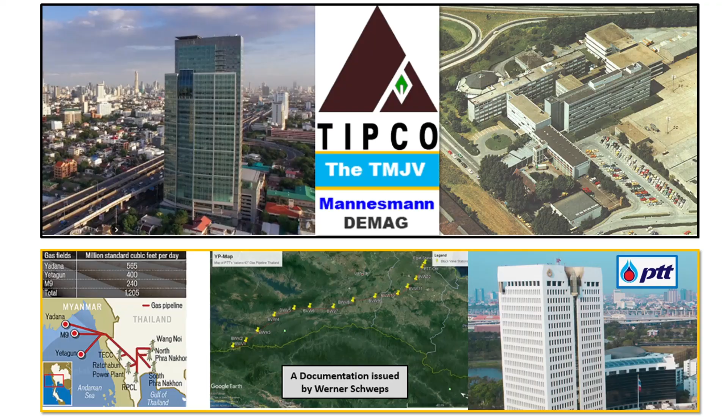Good day. My name is Werner Schweps, and I served as the project director for the TIPCO-Mannesmann joint venture. This joint venture, called TMJV, built the Yadana Gas Pipeline as a lump-sum turnkey contract in 1997-98 for PTT in Thailand. I have already shared some interesting videos about the project. However, my old friend Zurushet Supsar Korn asked me recently to make a short video about the project, which I

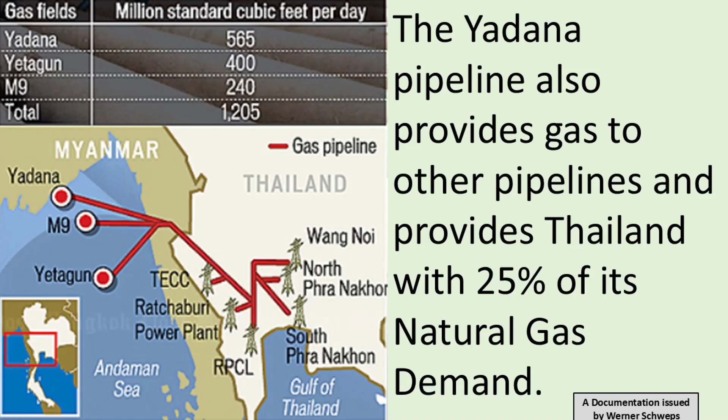am now presenting. The project involved constructing 240 kilometers of 42-inch diameter pipeline to transport gas from the border with Myanmar at Ban-I-Tong to a large power station in Ratchaburi, now known as Ratchaburi Power Company. The Yadana pipeline also supplies gas to other pipelines and provides Thailand with 25% of its natural gas needs. Since September 1998, the pipeline has been supplying gas from Burma and has been in operation for 28 years.

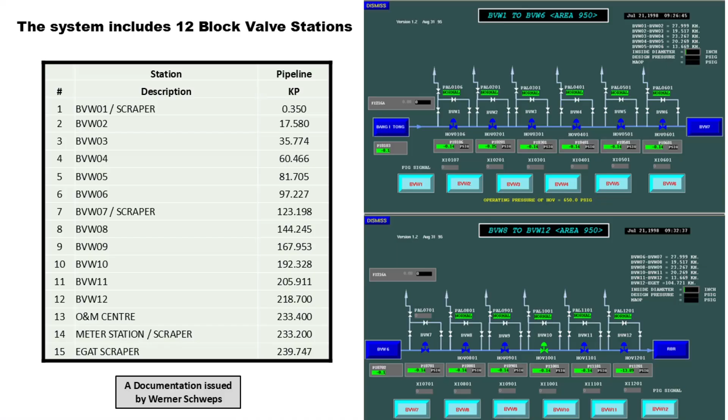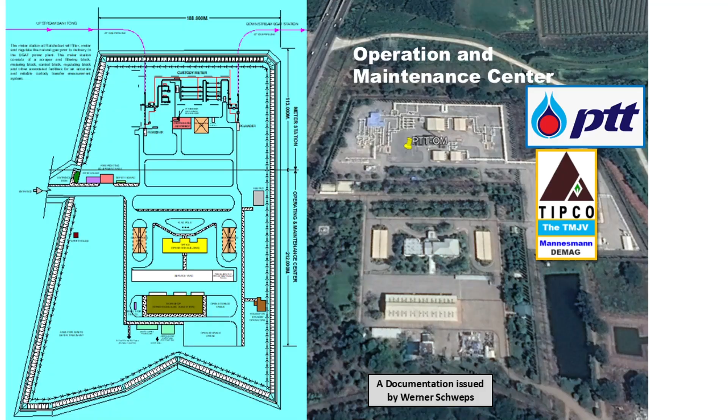The pipeline includes many ancillary facilities, such as 12 block valve stations, metering installations to measure gas flow, and a control center for operating and maintaining the pipeline. It also features a 240-kilometer-long fiber optic cable, telecommunication systems, and SCADA facilities, which are used for control and data acquisition to operate and monitor the Yadana pipeline.

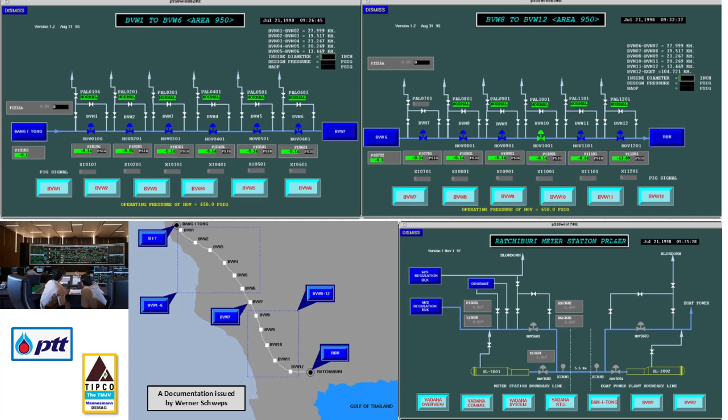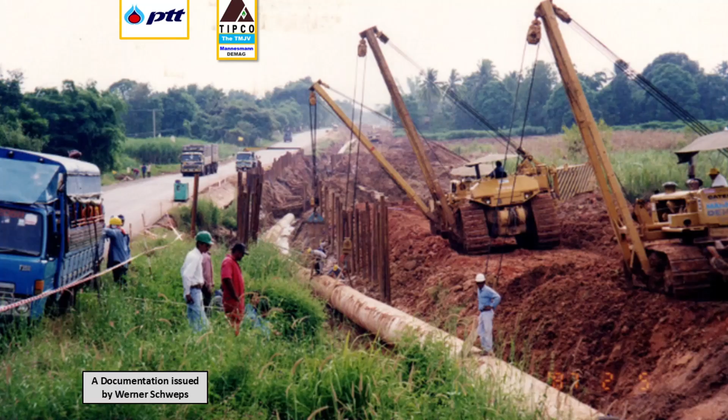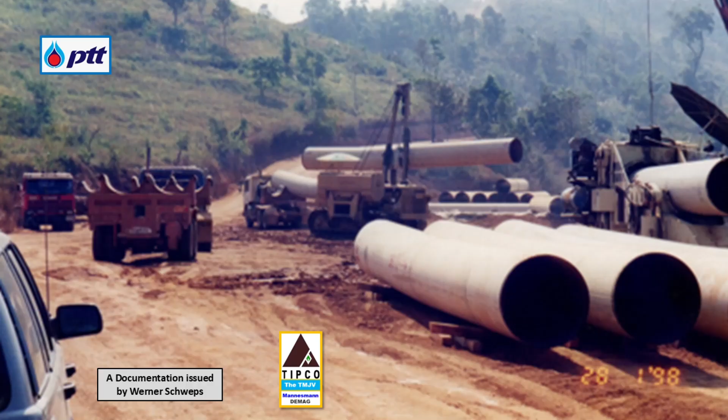The pipeline was laid through high mountains in an untouched forest area with steep slopes. It runs across agricultural fields, along roads and water canals, crossing 93 waterways. To accommodate changes in direction and elevation, the 42-inch pipes were bent by us using our heavy bending machines to create field bends. In particularly challenging terrain with tight curves and sharp elevation changes, we used over 80 factory-made hot bends supplied by us. Given the tight construction schedule, the project execution was extremely demanding.

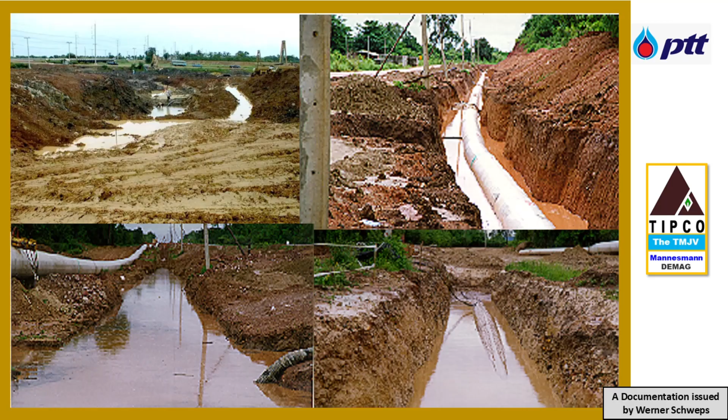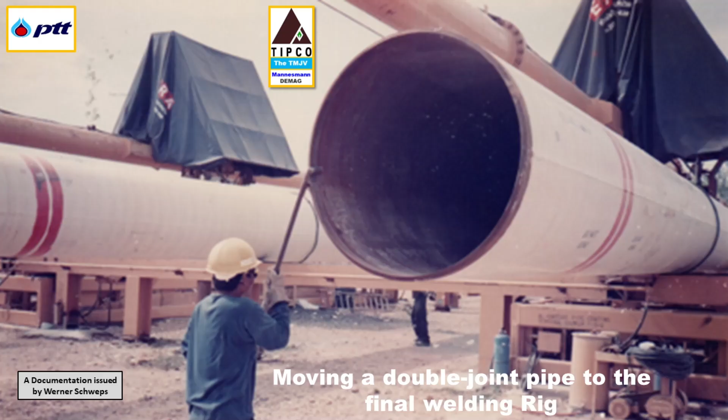The construction period was further limited because 5 months of the available work time coincided with the 1997 monsoon season with the severe tropical storm Linda, which hit us as well. To mitigate some of these challenges of the monsoon season, we decided to double joint about 90% of the 42-inch pipes, consisting of 8,808 welds that were made at our newly built Ratchaburi double joint yard. We completed this work within 4 months.

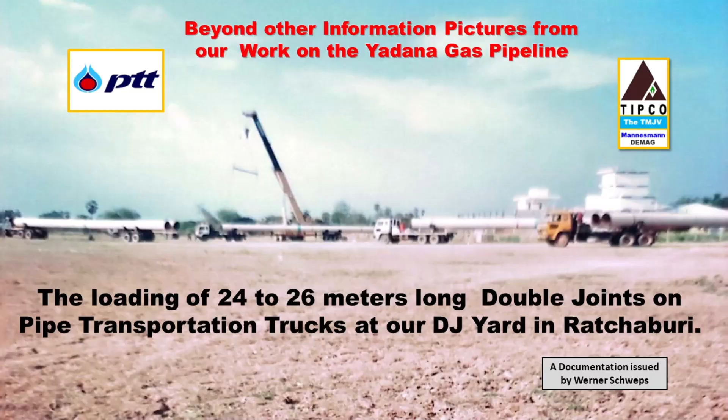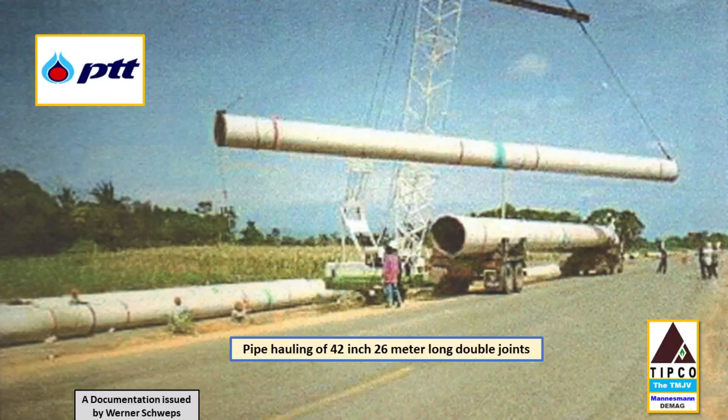While transporting the 25-meter-long double-joint pipes to the construction sites was difficult, time savings in the field were achieved due to 42% less pipe handling and welding. This saved time and fully equalized all the transportation challenges that we faced on the roads. For our main pipeline construction, we used at the beginning in April 1997 2 spreads as originally planned.

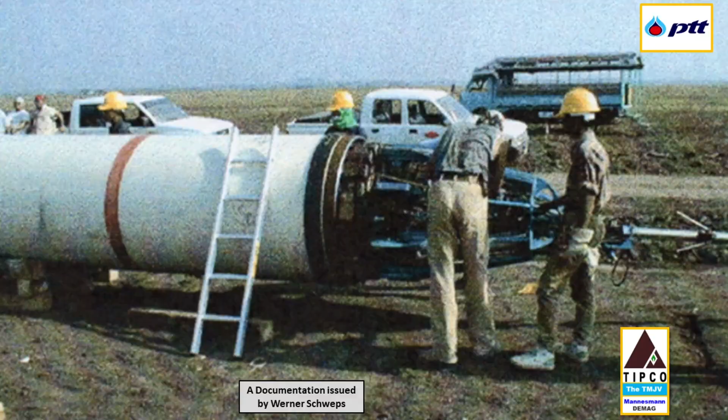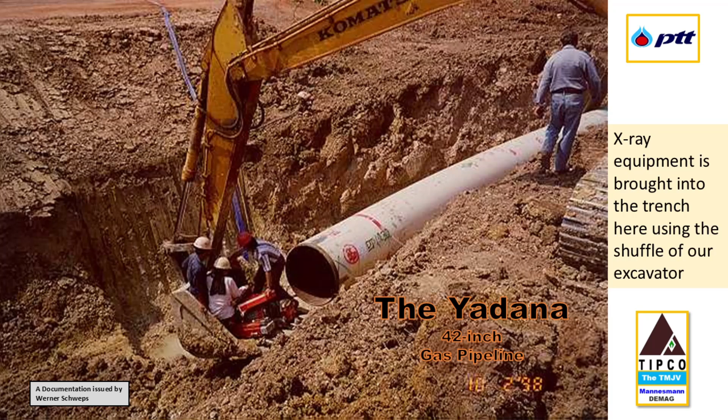All the field welding was carried out using a combination of manual and mechanized welding. We welded a total of 20,700 pipe welds. All 42-inch welds were inspected by radiographic and, to some extent, by ultrasonic testing. In addition, all welds were subjected to a high-pressure hydrostatic test conducted at 150 bar and above. The welds were all fusion-bonded epoxy-coated.

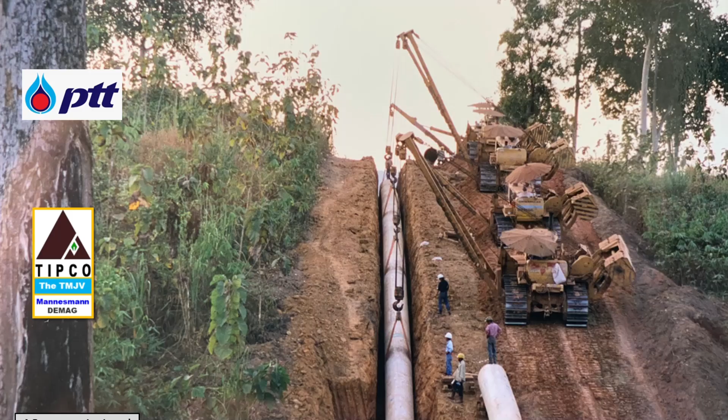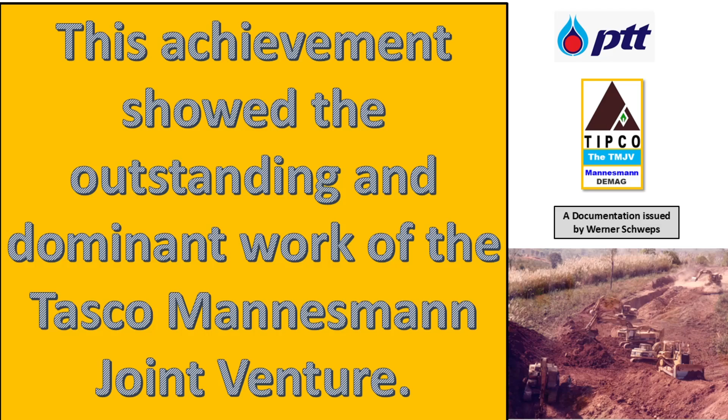The average pipeline laying rate into our excavated trench was 1,320 meters per day with those 2 spreads. We used our side booms for the lowering-in activity, including the subsequent tie-in work of the 42-inch pipe strings. The contract established 3 important milestone dates, and we reached all milestones ahead of schedule. This achievement showed the outstanding and dominant work of the TIPCO-Mannesmann joint venture. It is extremely important to note that our construction work was generally ahead of the project schedule.

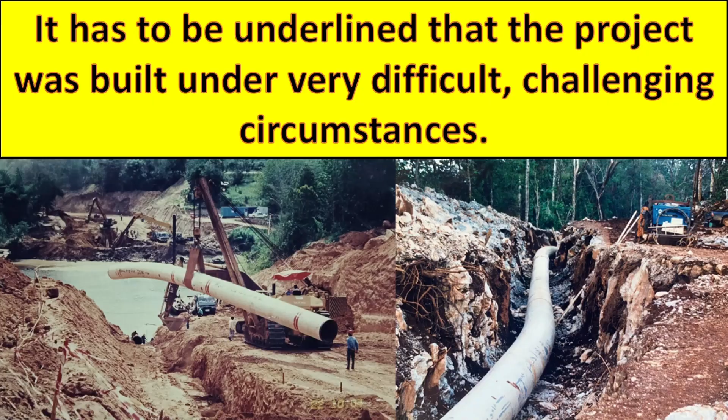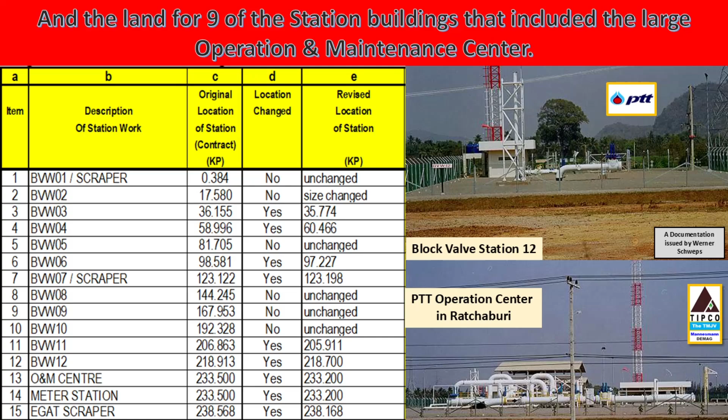It has to be underlined that the project was built under very difficult, challenging circumstances. This included many major technical problems and subsequent project design changes that resulted in 43 change orders. Moreover, there was the late handing over of 50 kilometers of land by PTT for our pipeline work and the land for 9 of the station buildings that included the large operation and maintenance center. In addition, we had 154 landowner stoppages.

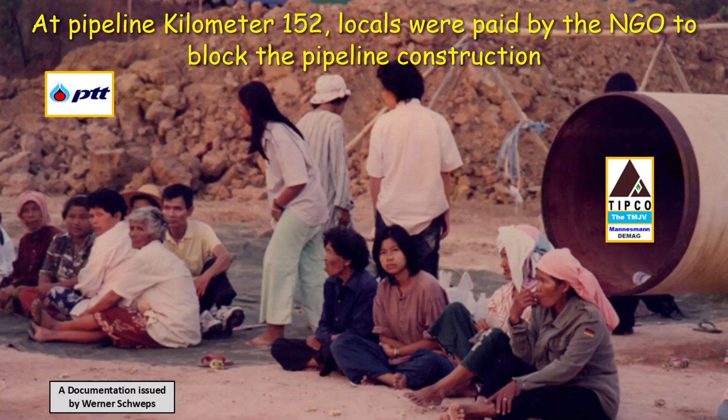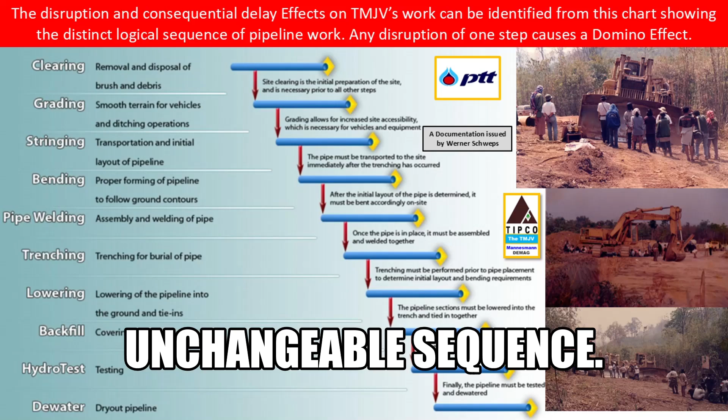The effect of the pipeline construction work stoppage and the relocation of activities was not only on the crew immediately suffering the stoppage. Each stoppage unavoidably impacted subsequent pipeline activities, since the construction of a pipeline is carried out by distinct work steps that are executed in a logical, unchangeable sequence. All this and some other issues, such as engineering errors discussed here later, led us to file claims demanding appropriate compensation from PTT.

But all these work delays weren't enough. Then, almost out of the blue, the Asian financial crisis hit Thailand in July 1997 very hard, and our project as well. This financial crisis impacted everyone and led to some sluggish monthly progress payments by our client PTT. From this time on, our change order work was not paid by our client. This payment occurred 20 months later.

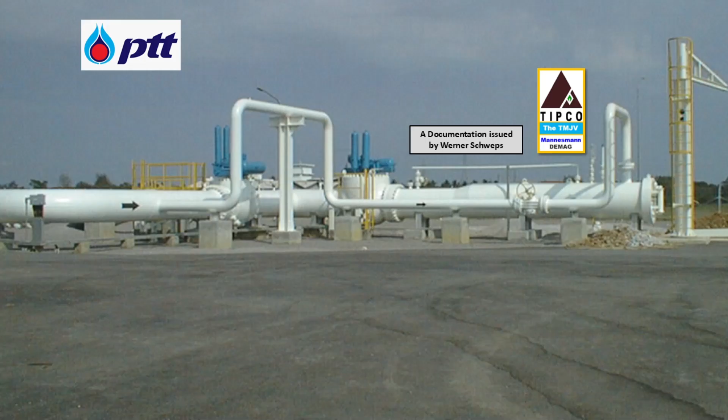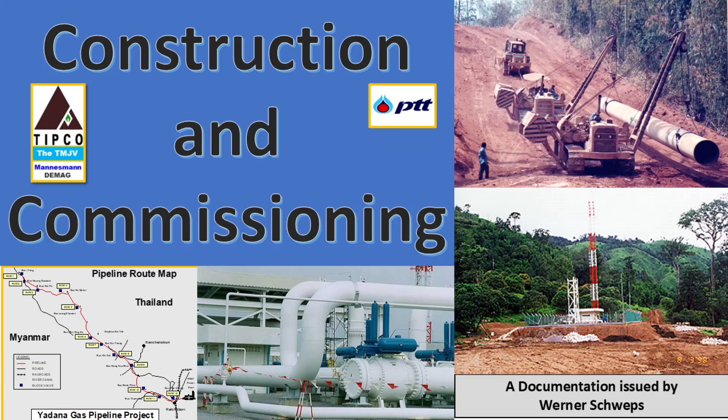To overcome this enormous liquidity problem, TIPCO and Mannesmann supported the joint venture in financing the huge ongoing project costs. It's essential to note that the joint venture was responsible for supplying all permanent pipeline materials and equipment, including 7.5 kilometers of 42-inch line pipe, as well as pipeline construction and commissioning.

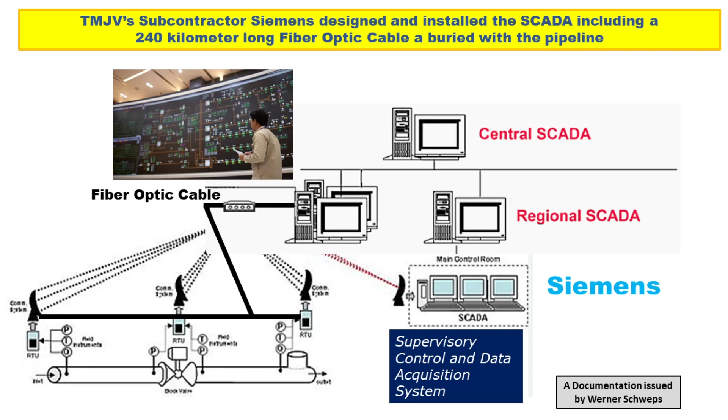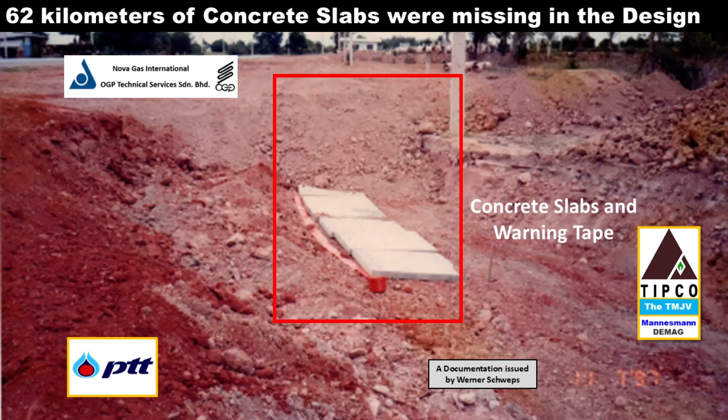Regrettably, the engineering included several design errors and deficiencies that clearly demonstrated that the construction site reconnaissance was inadequate. This was demonstrated by the 62 kilometers of missing protective concrete slabs for the gas pipeline along the roads, as well as the lack of a 1.5-meter soil cover for the pipeline.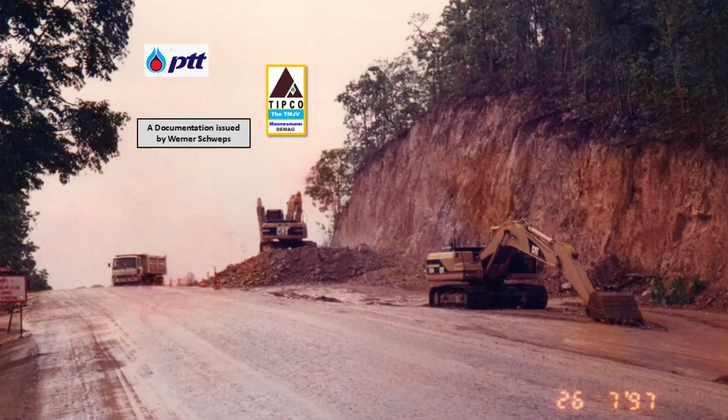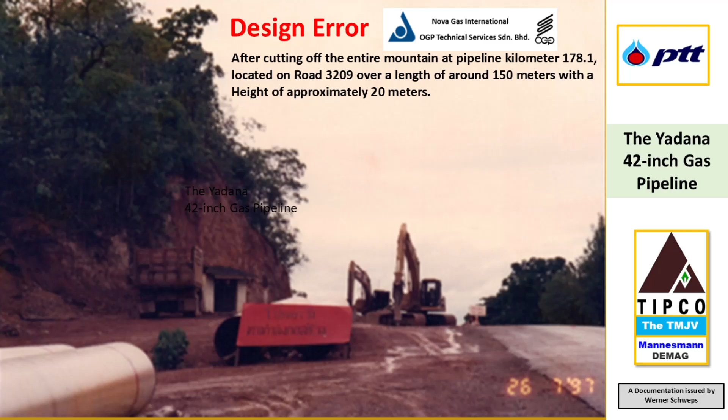Likewise, the removal of approximately 9 kilometers of adjacent road embankments, which consisted of mountains, was not specified in the drawings, and the highway department insisted on this removal to allow for future road expansions without relocating the pipeline. Here, we removed approximately 900,000 cubic meters of earth and rock to lower the embankment to road level.

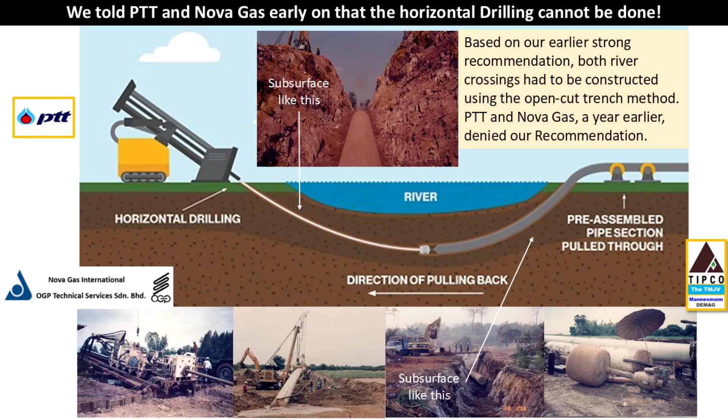For the two major river crossings of the Kwai River at Pipeline Kilometer 68 and Pipeline Kilometer 100, the horizontal drilling method in rock-saturated soil was specified by PTT and their engineering consultant, Nova Gas OGP. However, this drilling method was not feasible. It failed after 4 drilling attempts and had to be abandoned after the work began on the river crossing at Pipeline Kilometer 68.

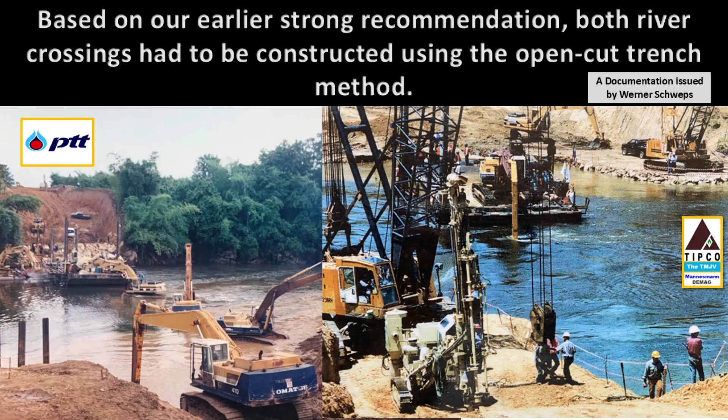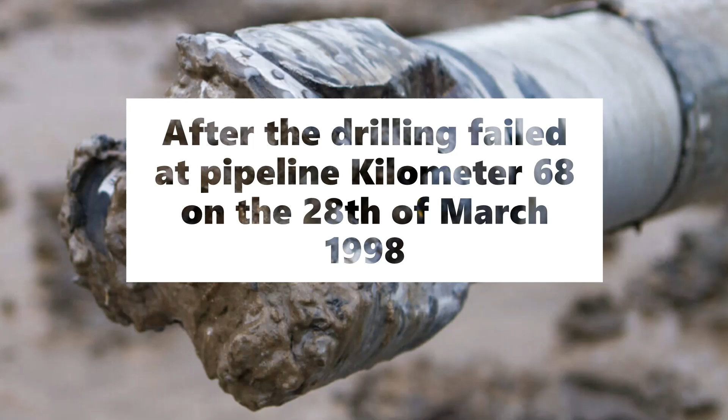Based on our earlier strong recommendation to our client PTT, both river crossings had to be constructed using the open-cut trench method. However, PTT and Nova Gas, a year earlier, denied our recommendation. Finally, after the drilling failed at Pipeline Kilometer 68 on the 28th of March, 1998, PTT agreed on the 31st of March, 1998 to use the open-cut method and told us, bizarrely, it is up to us what to use.

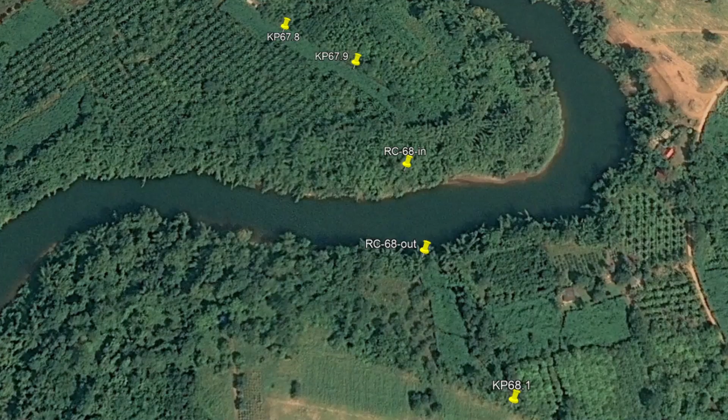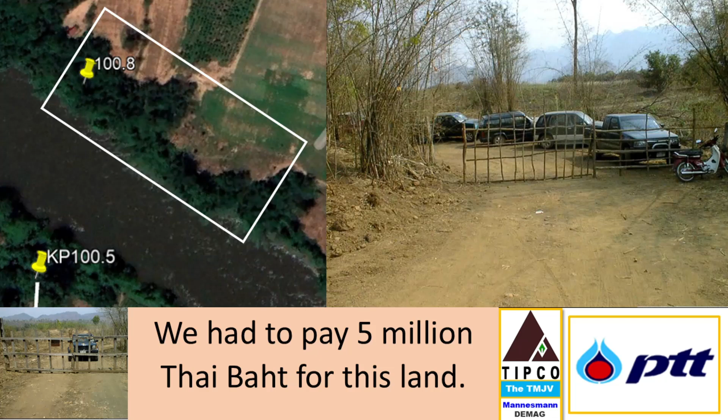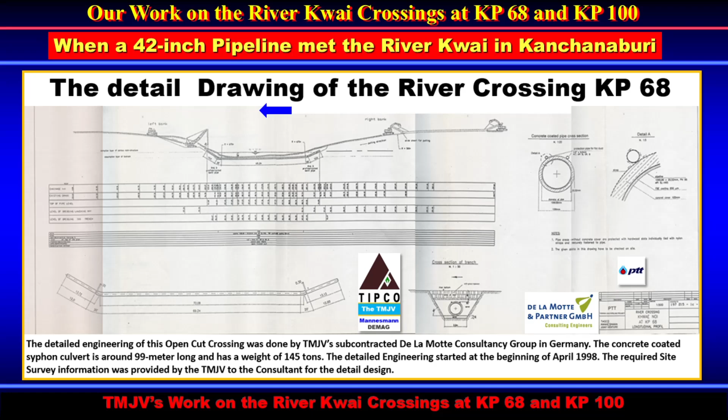We then had to negotiate with the landowners and clear the land. At Pipeline Kilometer 100, we had to acquire 20 rai, or 32,000 square meters of land, and we paid 5 million Thai baht for this land. In parallel, we had to carry out detailed construction planning and complete the detailed engineering work that we had already begun in anticipation of a possible horizontal drilling failure, and mobilize pontoons and other specialized construction equipment, such as drilling rigs and others, in an extreme hurry.

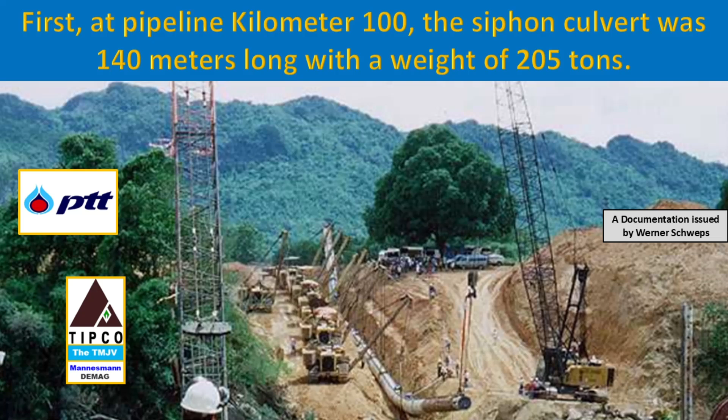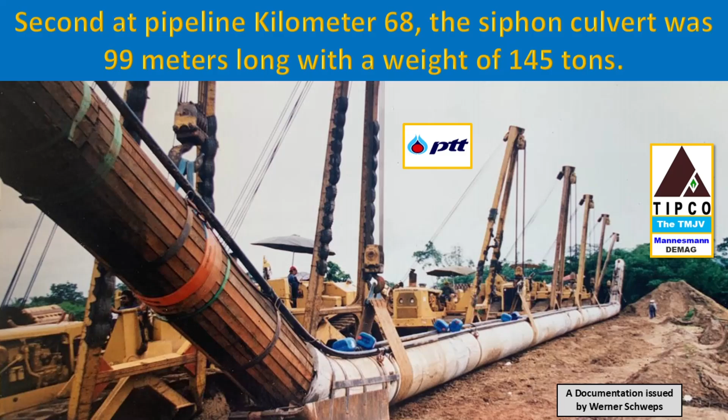The two concrete-coated swan neck siphons prefabricated by us had the following dimensions. First, at Pipeline Kilometer 100, the siphon culvert was 140 meters long with a weight of 205 tons. Second, at crossing KP 68, the siphon culvert was 99 meters long with a weight of 145 tons. As it is obvious from these dimensions and weights, those pipe strings were large and heavy, making them difficult to transport to the trench location in the river.

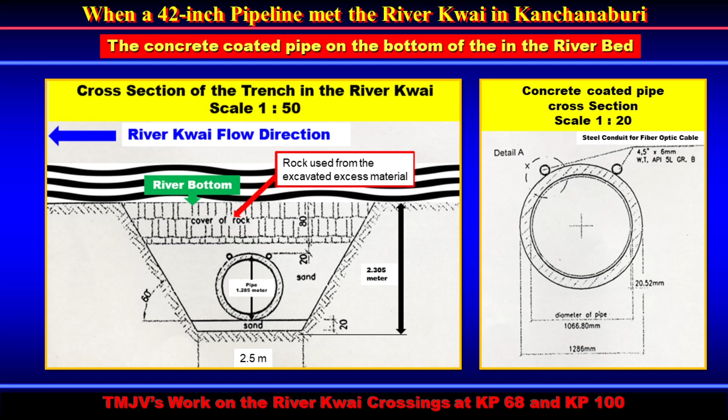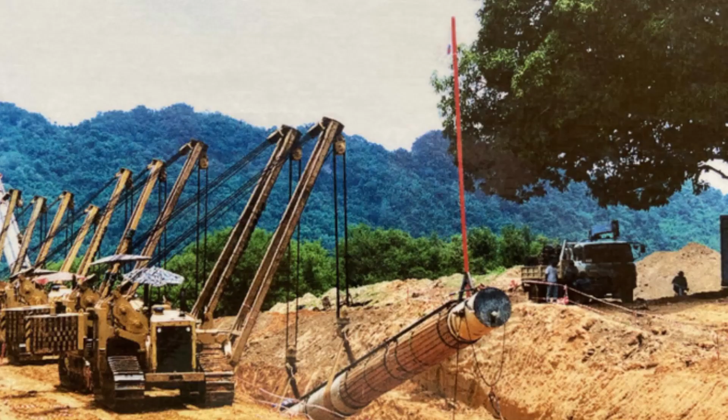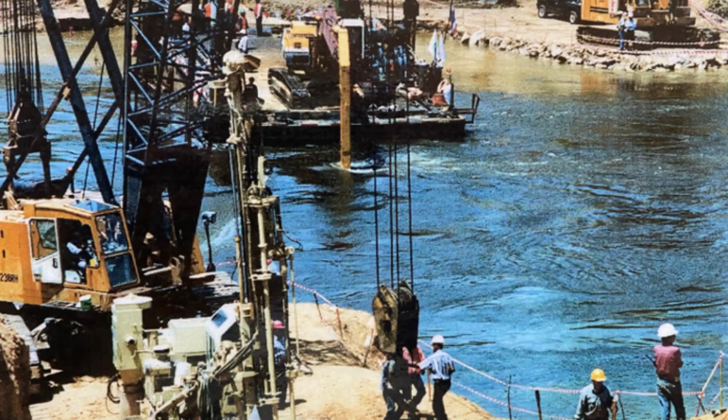The underwater rock blasting was one of the major challenges, along with rock removal, to achieve the required depth of around 2.3 meters in the river trench measured from the river bottom. For the lowering in, we used a total of 8 side booms, 2 70-ton cranes, and an excavator on a pontoon. With our side booms, we managed to move the siphon culvert from the fabrication area near the West River bank, slowly and steadily. The 70-ton cranes were positioned on either side of the river, while the excavator was situated on a floating pontoon in the middle of the waterway.

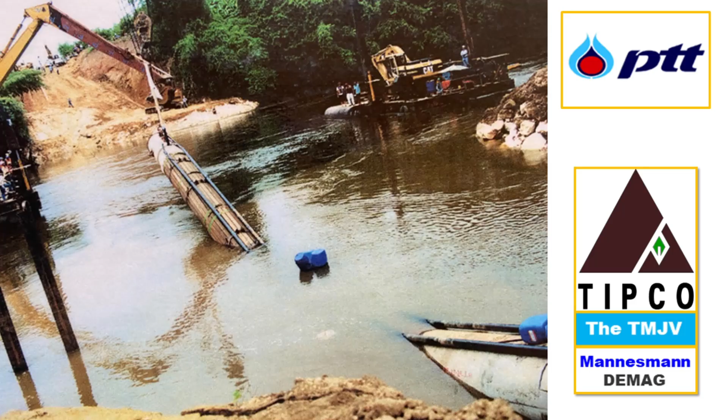To keep the siphon culvert in the correct position against the river's current, we used steel cables connected to the excavator on the pontoon located in the middle of the river. Once the culvert passed the halfway mark, the second crane located on the east side of the river took over and moved the culvert forward to the excavated trench on the right-of-way river embankment. We repeated the same process at the launching bank by centering the siphon culvert into the trench.

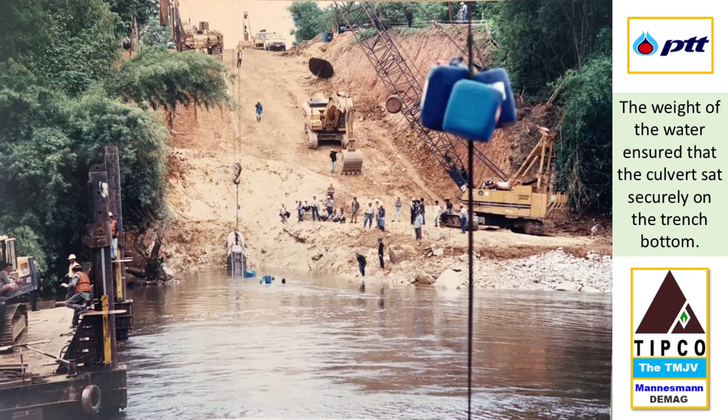After aligning the culvert, we carefully lowered it into the trench and filled it with water. The weight of the water ensured that the culvert sat securely on the trench bottom. Both river crossings were successfully completed by us in mid to late June 1998.

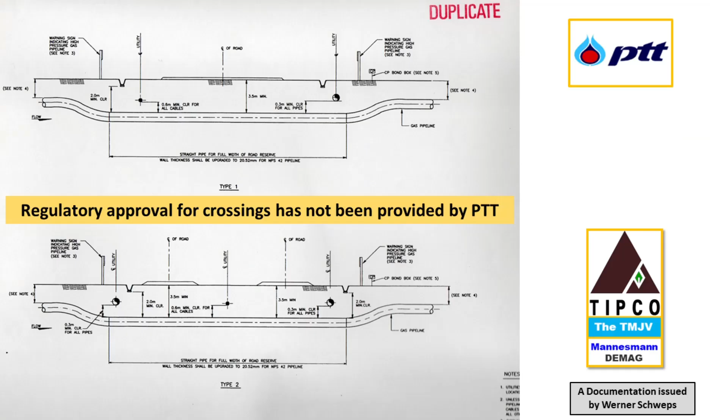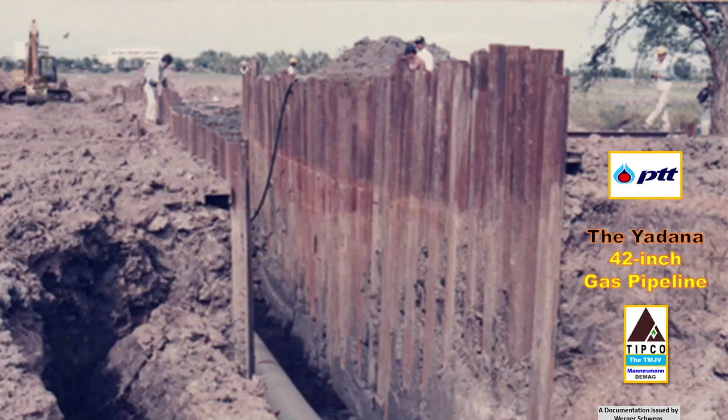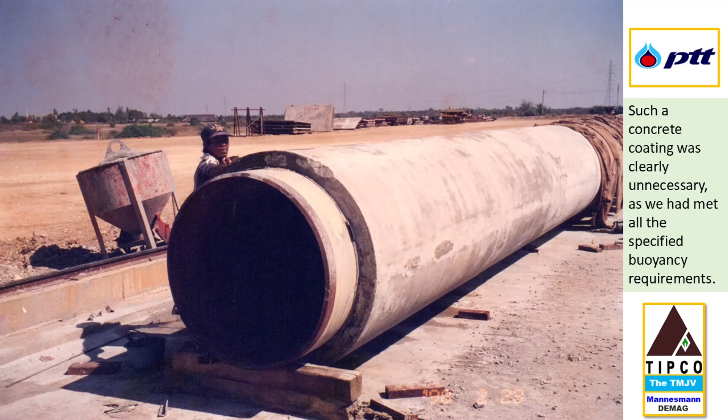Yadana Gas OGP has not produced any detailed construction drawings for river and road crossings. This posed a problem, for example, at the Lumpachi Canal crossing. After completion of our work, Yadana Gas OGP requested an additional technical measure, the concrete coating of the already laid pipeline section. Such a concrete coating was clearly unnecessary, as we had met all the specified buoyancy requirements. Nevertheless, this artificially created problem stuck with us until the end of the project.

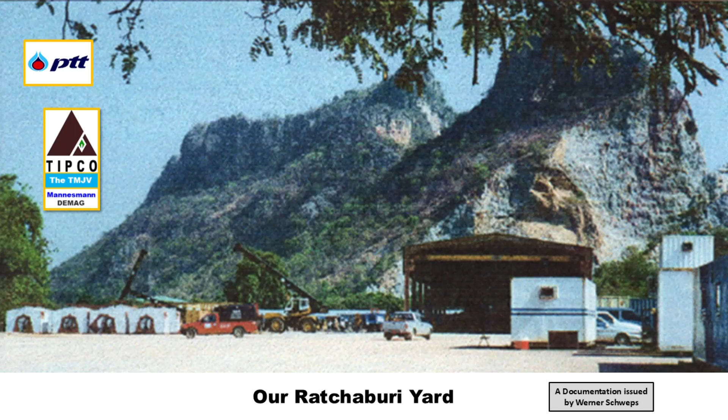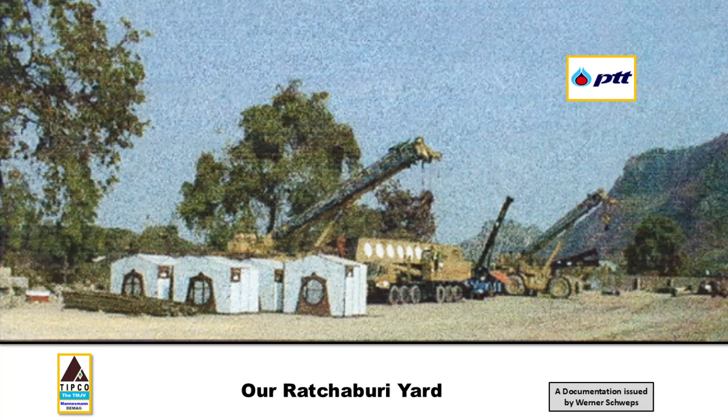To mitigate the effects of the monsoon weather and also to have more flexibility in working hours, as well as to increase efficiency, we, the TIPCO Mannesmann joint venture, built a project prefabrication yard in Ratchaburi at the beginning of the project, which included a storage area and a workshop for the maintenance of construction machinery.

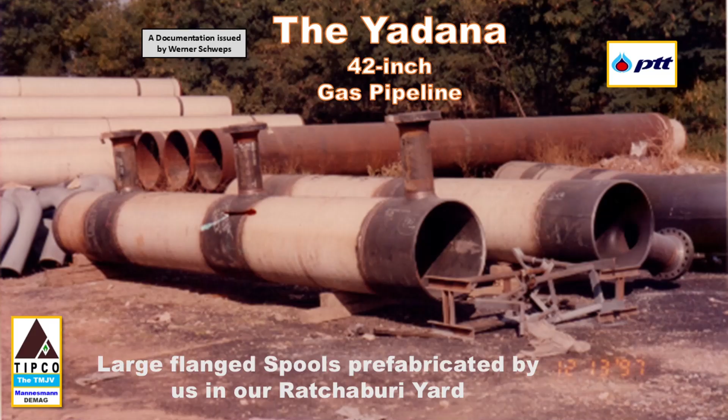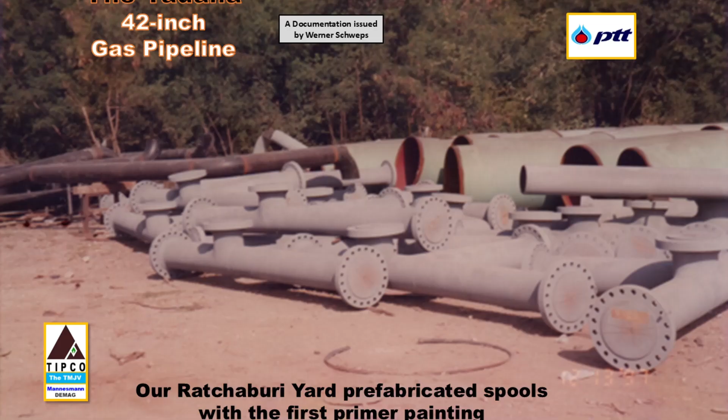The other main advantage was factory-like working conditions. This setup enabled us to mass-produce items for installation in the pipeline facilities. Our prefabrication yard was equipped with cutting tools, welding facilities, and all the necessary equipment for steelwork. Piping and structural prefabrication were carried out to ensure an optimal balance between ease of handling and minimizing the number of field welds. Additionally, sandblasting and painting activities were conducted in our prefabrication yard.

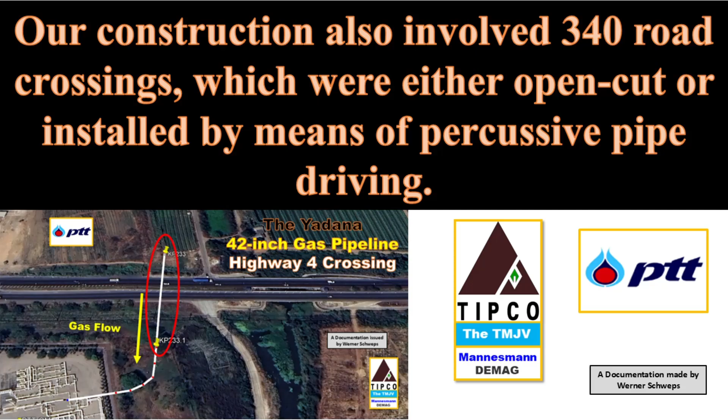Our construction also involved 340 road crossings, which were either open-cut or installed by means of percussive pipe driving. The largest road crossing was at Highway 4 in front of PTT's Operation and Maintenance Center, and we used the pneumatic pipe rammer for a pipe crossing length of around 100 meters.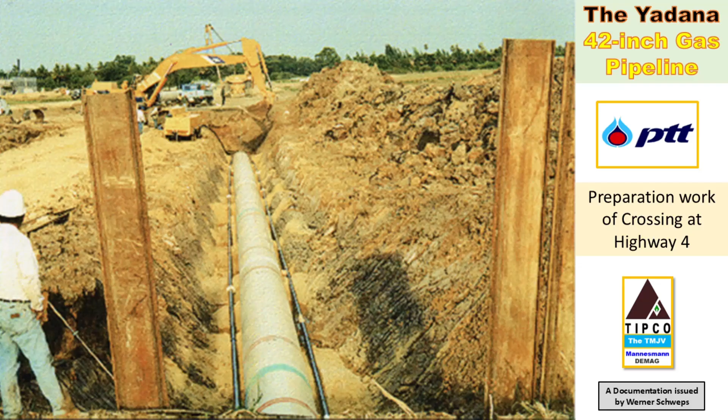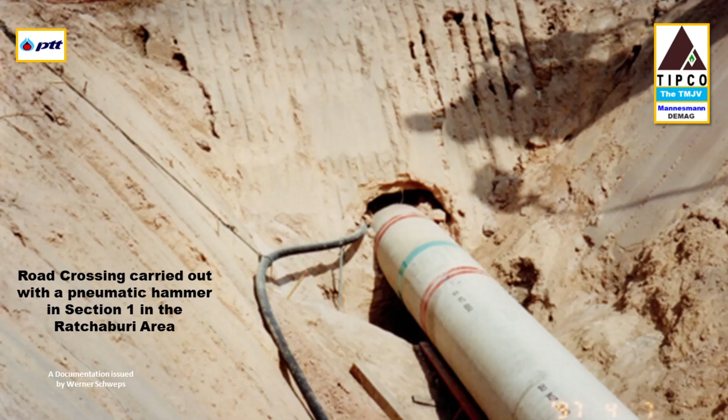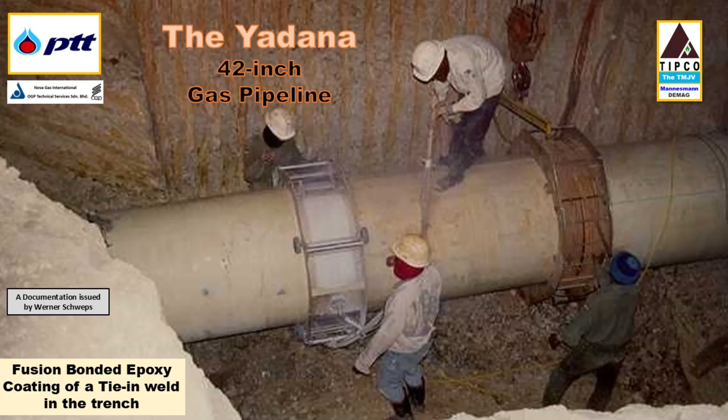The pipe rammer pushed the pipe in one continuous run through the clay soil underneath Highway number 4, having a material cover of more than 3 meters on the top of the pipe, whereby the traffic was not disturbed by our work. During the pipe ramming, the earth was accurately swallowed up by the 42-inch pipe. Later the earth was pushed out like a sausage through the pipe crossing end by using compressed air and some water. Subsequently, the crossing was connected to the pipeline, and the weld was FBE coated. The work was done by us in May 1997.

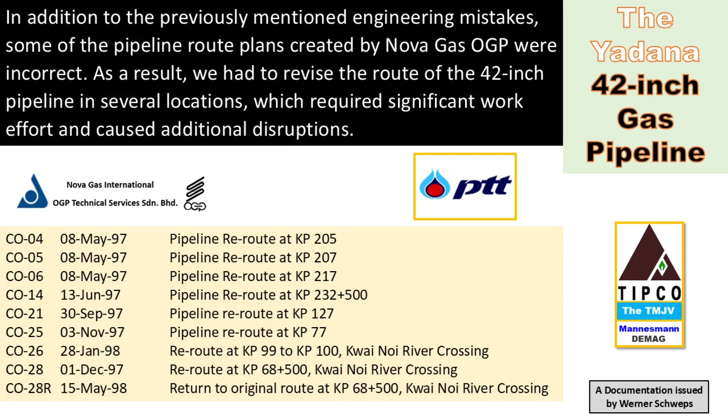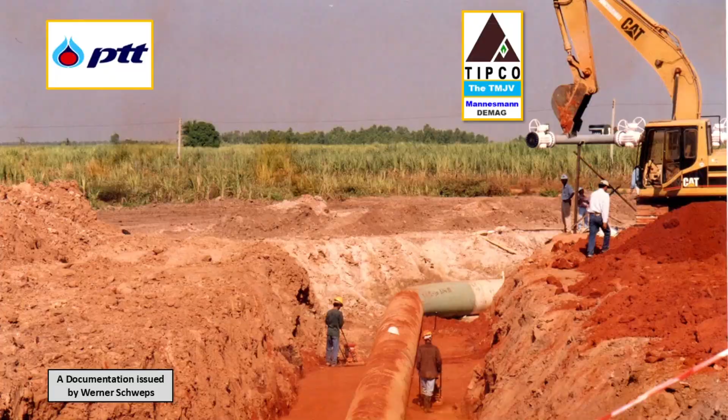In addition, there was one railway crossing with a casing pipe installation at pipeline kilometer 229. Over the course of the project, our crews had to deal with 93 water crossings that included 3 major river crossings, as discussed before. Along with the previously mentioned engineering errors, some pipeline route profile plans issued by Nova Gas OGP were flawed. Consequently, we had to reroute the 42-inch pipeline in several areas, which involved significant effort and led to additional work disruptions.

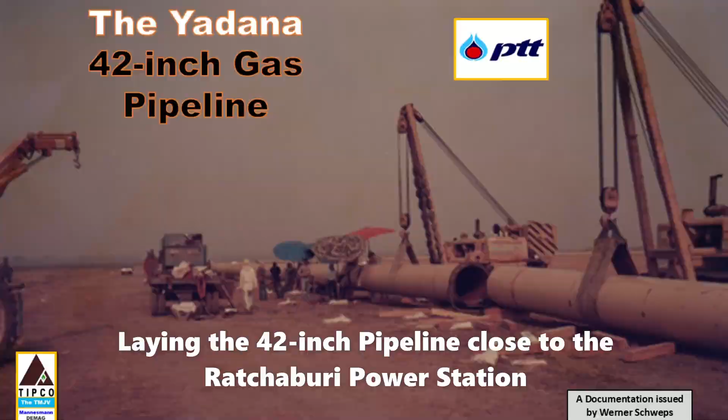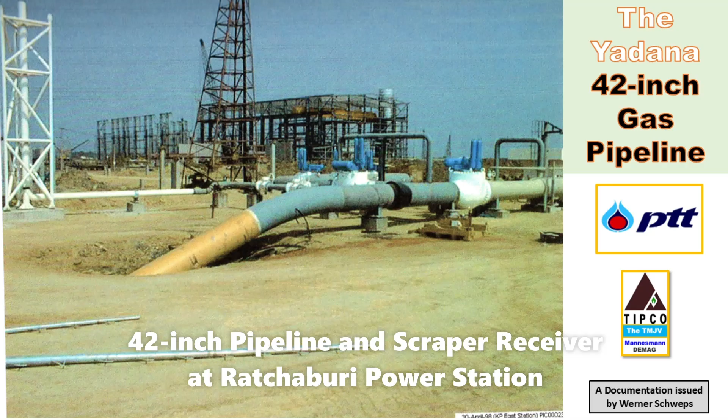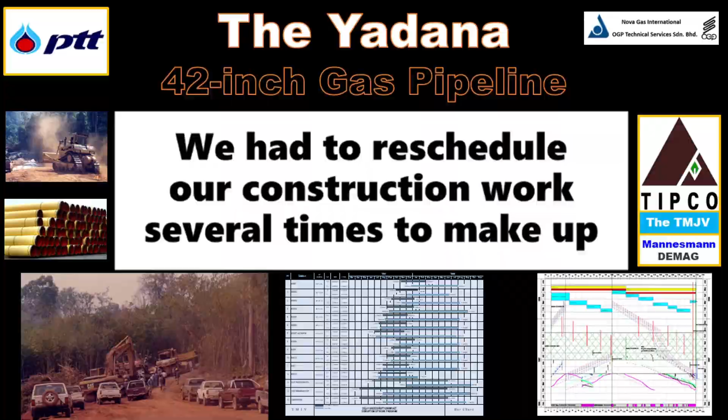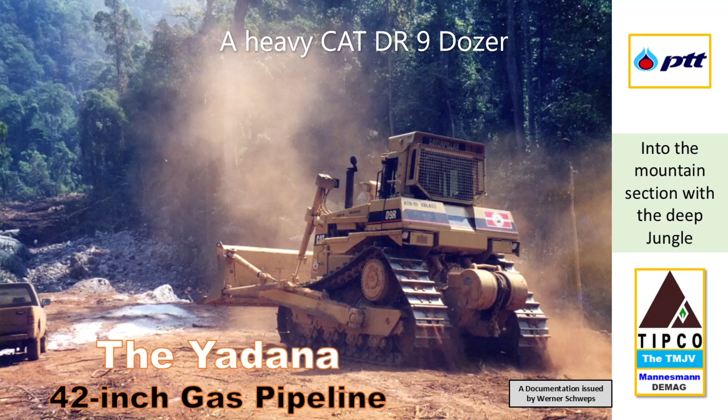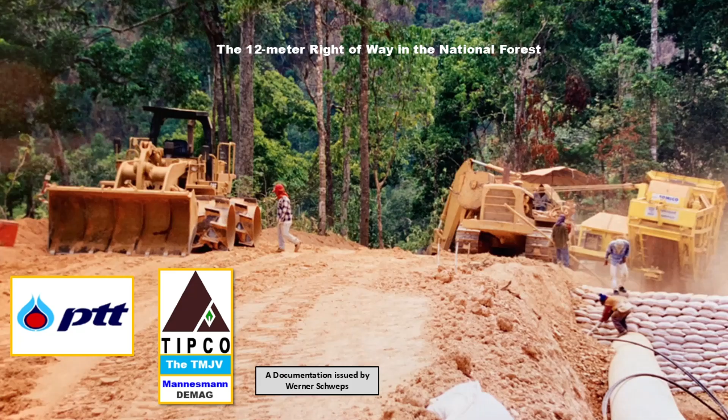We had to reschedule our construction work several times to make up for engineering design changes, the lost time due to landowner stoppages, and the unavailability of some large portion of the land needed to complete the project. Among other measures, we mobilized and deployed a third pipeline spread in November of 1997 and immediately started the construction work in the mountain section after the land was provided by PTT. To make matters worse, the pipeline right-of-way width was limited to 12 meters over a 6-kilometer-long stretch through the steep mountainous National Forest Reserve. This forest land was provided to us by PTT only in March 1998.

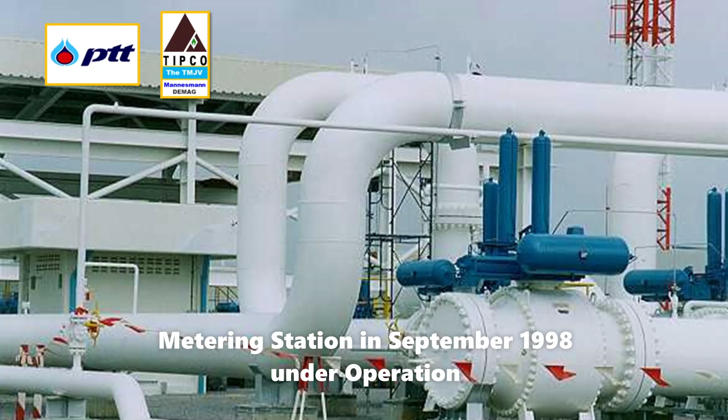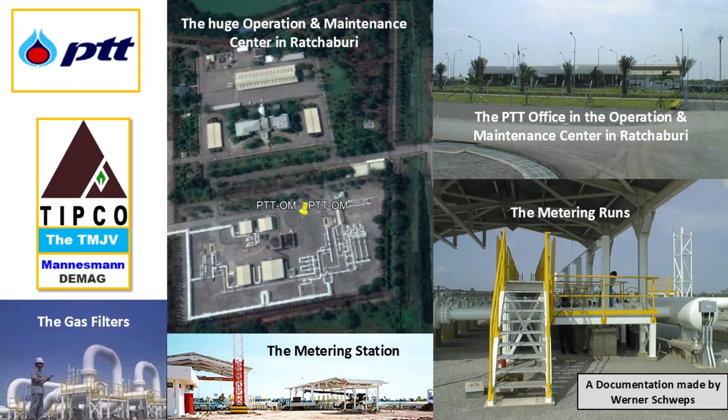Our third pipeline spread, as detailed in our claims, was very costly for the Tasco Mannesmann joint venture. Only after the pipeline project was completed and had been in operation since September 21, 1998, did PTT accept some parts of our legitimate claims. This was primarily done by retrospectively extending the project duration by 101 days. PTT paid us, delayed until July 1999, which meant more than a year after the construction was completed. This was a long wait for us, considering our numerous open commitments.

At the end of the 42-inch Yadana Gas Pipeline Project, the summary of major quantities was as follows. 1,023,000 cubic meters of excavation in trenches were dug out. 360,350 cubic meters of earth filling in stations were installed. 600 concrete piles were rammed into the ground. 196,000 meters of wick drains were installed in the operation and maintenance center. 21,000 mainline welds were welded, that is a total of 70 kilometers welded length.

20,000 liters of fuel consumed on average per day by our construction equipment. 62,000 meters of concrete slabs installed adjacent to highways. 105,000 cubic meters of rock blasting was done by us. 900,000 cubic meters of road embankment was removed by us. 8,500 field bent pipes and 80 factory hot bends were installed. 500,000 sandbags were permanently put in place.

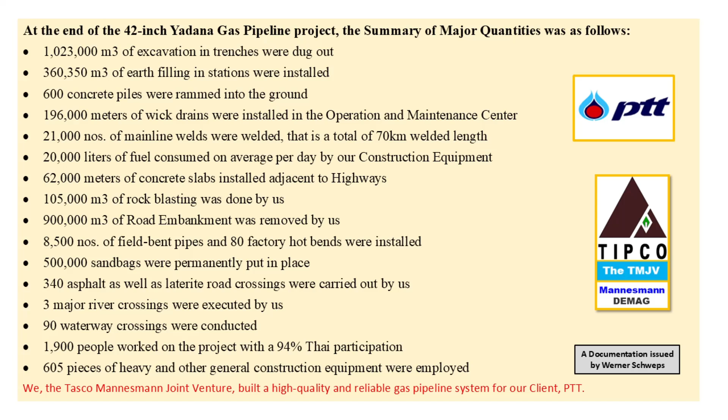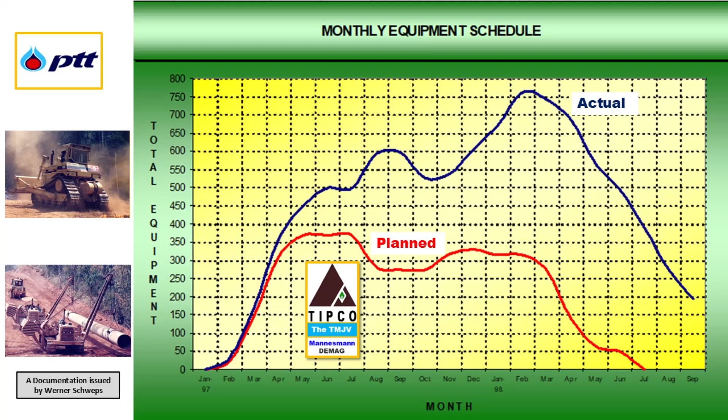340 asphalt as well as laterite road crossings were carried out by us. 3 major river crossings were executed by us. 90 waterway crossings were conducted. 1,900 people worked on the project with a 94% Thai participation. 605 pieces of heavy and other general construction equipment were employed. We, the Tasco-Mannesmann joint venture, built a high-quality and reliable gas pipeline system for our client, PTT.